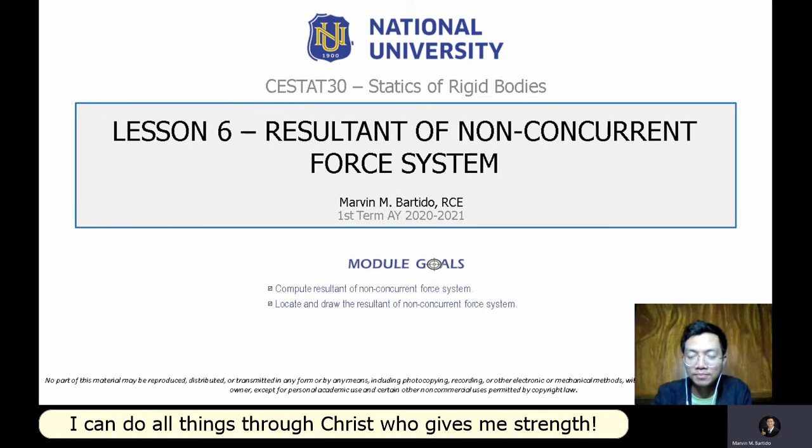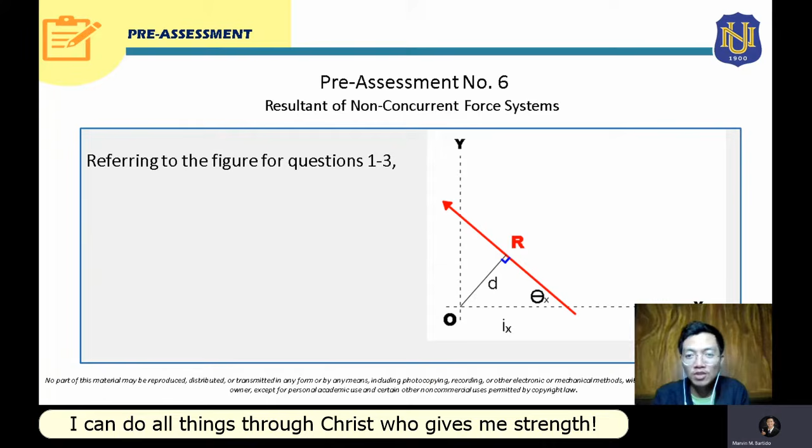So before we proceed to our discussion, you will answer first these problems for bonus points. Okay, so referring to the figure for questions 1 to 3, here's the problem. If Ry is equal to 250 Newton, Rx equal to negative 190 Newton, and Ix equal to 5 meters, determine the moment about point O.

The second question is, if the moment at point O is negative 200 pound-inch and distance d is 3 feet, determine the resultant R. And for the last question, number 3, if Ry is equal to 10 kips, Rx equal to negative 7 kips, and Ix is equal to 7 feet, determine the distance d.

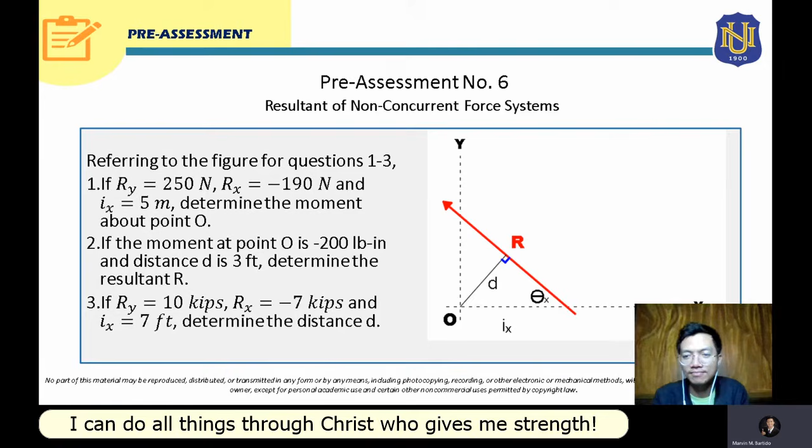Recalling non-concurrent force systems, these are force systems wherein the forces don't meet at one point. So these are force systems that are neither concurrent nor parallel. So for resultant of non-concurrent force systems, to solve for the magnitude of the resultant, that will just be R is equal to square root of Rx squared plus Ry squared, wherein Rx, that will be the horizontal component of the resultant, and it can be solved by the summation of all the horizontal components of the forces in the system.

Okay, and Ry, that will be the vertical component of the resultant, and it can be solved by the summation of all the vertical components of the forces in the system. Now, for the inclination of the resultant with respect to x-axis, we can use tangent of theta x equals to Ry over Rx, wherein Ry is the vertical component of the resultant, and Rx is the horizontal component of the resultant. So to solve for theta x, that will just be arctangent of Ry over Rx.

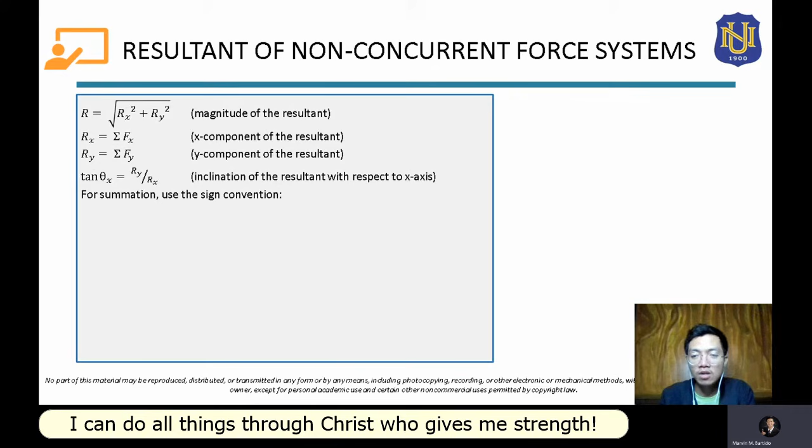Now, for the summation of vertical and horizontal components of forces, we can use the sign convention that if the force is directed to the right, in the summation, that will be positive for horizontal component. But if it's directed to the left, that will be negative in our summation. Now, if the force is directed upward, that will be positive in the summation for vertical components, and if it's directed downward, that will be negative.

So let's say we have here this non-concurrent force system. This is non-concurrent since all the forces here don't meet at one point. This force system is neither concurrent nor parallel. So for this non-concurrent force system, if we solve for its resultant, let's say the resultant will be located somewhere here. So this will be the resultant R, and its direction will depend on your Rx, the horizontal component of your resultant, and Ry, the vertical component of your resultant.

So in this case, if your horizontal component of the resultant is negative in your summation, its direction will be to the left, okay? And if your summation for Ry is positive, meaning to say your Ry is directed upward. So the resultant is upward and to the left. Let's say this is the direction of your resultant R. So your theta x will be located here. This will be the inclination of this resultant from the horizontal, and we solve it using tangent theta x equal to Ry over Rx.

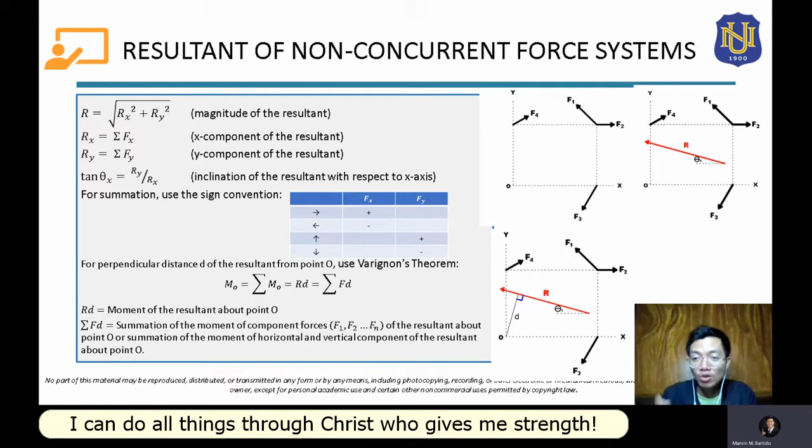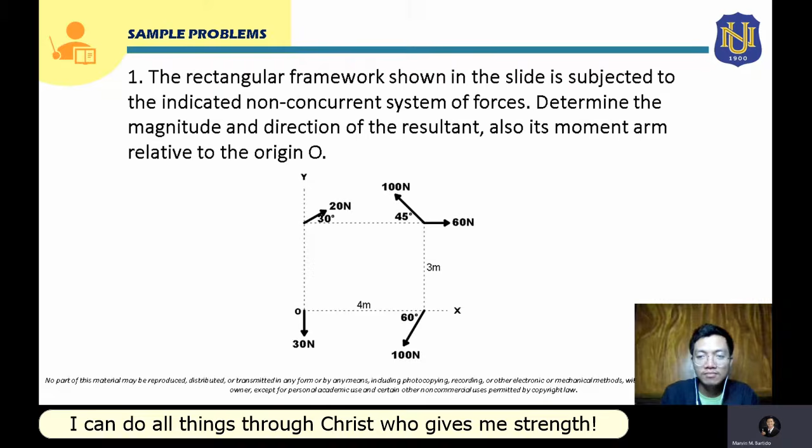So this force system is non-concurrent because the forces here don't meet at a common point. And this force system is also not a parallel force system. So meaning to say this is a non-concurrent force system. So let's start solving this. For this problem, we are asked to solve for the resultant. So your resultant must include the magnitude, the direction, and inclination or theta x. We are also asked to solve for the moment arm of the resultant from point O. So the moment arm here is the perpendicular distance d of the resultant from the specified point, which is point O.

So to solve for the resultant, we must first solve for Rx and Ry. So Rx will just be equal to the summation of all the horizontal components of the forces in the system. We have here this assumption that forces directed to the right will be positive. So let's start with this 20 Newton force. This is 30 degrees from the horizontal, so its horizontal component will be 20 cosine 30 degrees. Since it is directed to the right, it will be positive in our summation.

Now, this 100 Newton force is inclined 45 degrees from the horizontal, and its horizontal component will be 100 cosine 45 degrees. Since it is directed to the left, it will be negative. Now, our 60 Newton force is already a horizontal force, so this will be directly included in our summation. Since it is directed to the right, it will be positive. Now this 100 Newton force is 60 degrees from the horizontal, so its horizontal component will be 100 cosine 60 degrees, and since it is directed to the left, it will be negative.

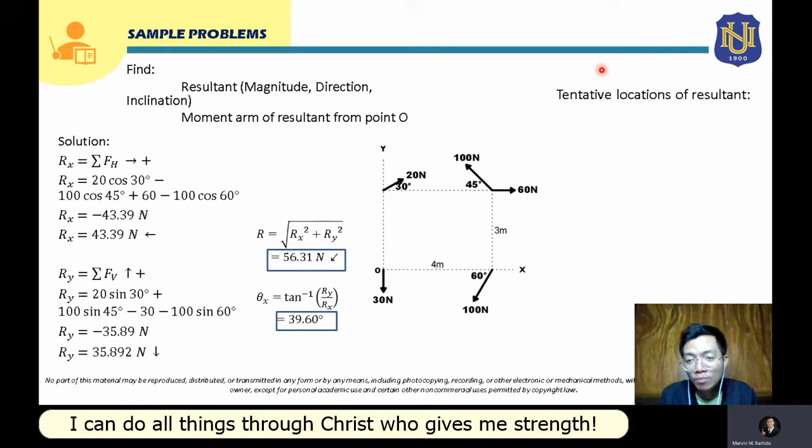Now, we are also asked here to solve for the moment arm of the resultant from point O. So we can have here tentative locations of the resultant. We can assume where we can find our resultant, but this will just be tentative since we are not yet sure of the location of the resultant. So this will be the tentative location.

So our resultant R will be theta x from the horizontal. Since it is downward to the left, it can either be located somewhere here or somewhere here. This location can be checked or proved, where the correct location will be, by solving for the moment of this system.

So if the moment of all these forces about point O, let's say, is clockwise, your resultant must be located here to produce a clockwise moment about point O. But if the moment of these forces about point O is counterclockwise, your resultant R should be located somewhere here so that it can produce a counterclockwise moment. So the location of your resultant will depend on that. We will check that on our succeeding slide.

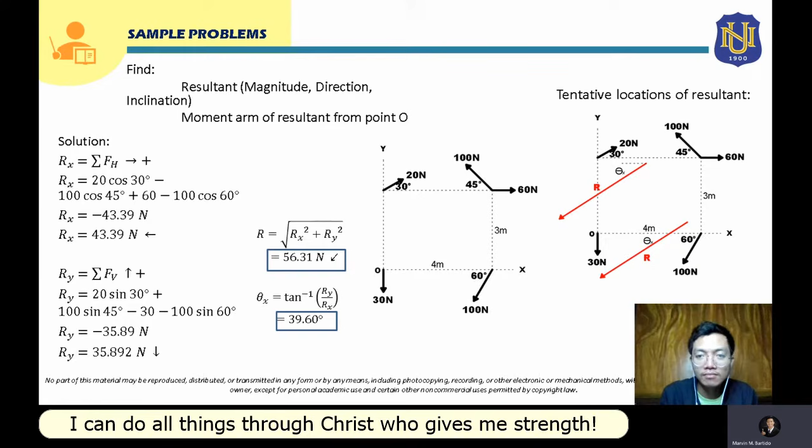So again, these are the tentative locations of our resultant. It can either be located somewhere here, at theta x from the horizontal, or somewhere here, also theta x from the horizontal. To confirm the location of our resultant R, we can take a moment about point O. So we can solve for the moment of the component forces of our resultant R. These are 20 Newton, 100 Newton, 60 Newton, 100 Newton, and this 30 Newton force.

So if we take their moment about point O, and their moment about point O is positive, meaning your moment is clockwise, then your resultant R's moment should be clockwise also. So it should be located somewhere here so that it can produce clockwise rotation about point O. But if the resulting moment of these component forces about point O is negative, meaning that moment is counterclockwise, your resultant should be placed somewhere here so that it can produce a counterclockwise moment about point O.

So let's start solving for the moment of the component forces about point O. The moment at O is equal to the summation of all the forces that have moment at O, and that will also be equal to the moment of the resultant about point O, so that will be Rd. Our assumption here is that clockwise moments or rotations will be positive.

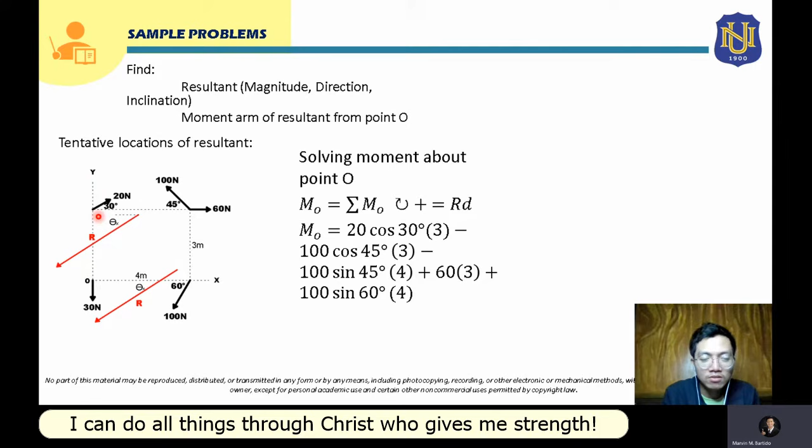Let's start solving the moment of this 20 Newton force about point O. If we put our component forces here, the vertical force will pass through point O, meaning it will have no moment about point O. So only the horizontal component of the 20 Newton force, which is 20 cosine 30 degrees, will have a moment about point O. Its moment arm about point O will be this perpendicular distance, 3 meters. It will rotate this way, clockwise, so it will be positive in our summation.

Now, for our 100 Newton force here, if we put our components here, both component forces will have a moment about point O. Let's start with the horizontal component, which will be 100 cosine 45 degrees. Its moment arm about point O will be 3 meters also. Its rotation about point O will be this way, counterclockwise. That's why it will be negative here.

Now, its vertical component will be 100 sine 45 degrees, and its moment arm will be this perpendicular distance about point O, which is 4 meters. So that will be 4 here. Its rotation about point O will be counterclockwise; it will rotate this way. That's why it's negative here.

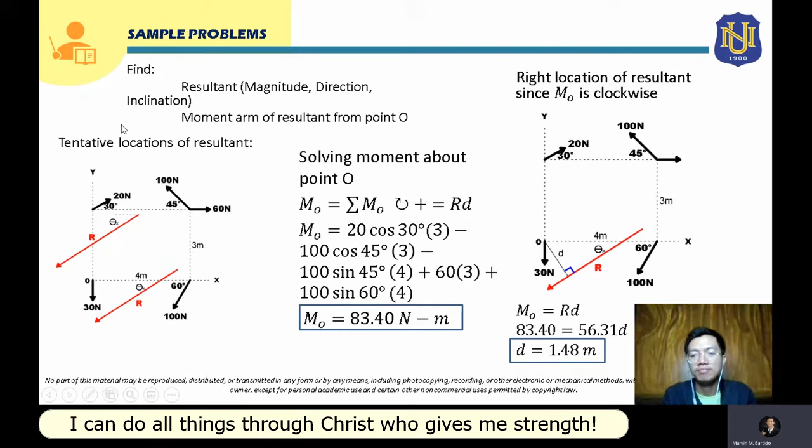Now, for sample problem number 2: in a certain non-concurrent force system, it is found that the summation of Fx is equal to negative 80 Newton, the summation of Fy is equal to 160 Newton, and the summation of M sub O is equal to 480 Newton meter in a counterclockwise sense. Determine the point at which the resultant intersects the x-axis.

For this problem, the summation of Fx is actually the horizontal component of our resultant, negative 80 Newton, meaning this horizontal component is directed to the left. The summation Fy is the vertical component of the resultant, and since it is positive, it is directed upward.

We also have a moment at O equal to 480 Newton meter, and this is counterclockwise, so that will be negative. We are asked to determine the point at which the resultant intersects the x-axis. So let's start solving this.

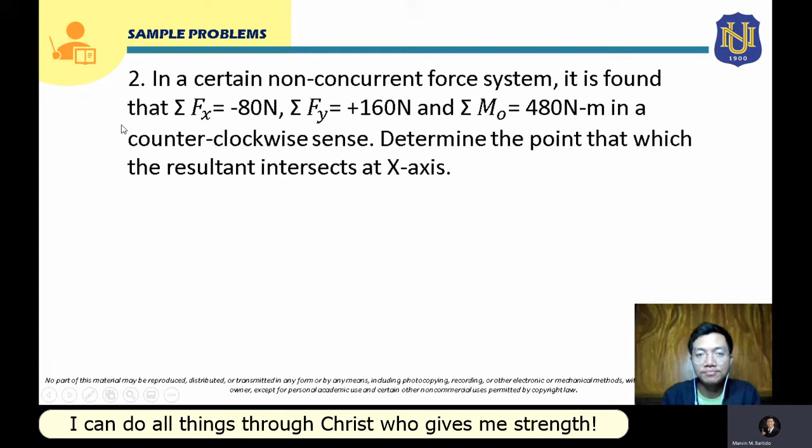Again, these are the given for this problem. So we have here Rx, or the horizontal component of the resultant. We have here the Ry, or the vertical component of the resultant. And we have here moment about point O. So this will be the illustration of this problem.

So our resultant will be directed this way because our Ry is upward, right? And from our Rx, that will be directed to the left. So meaning to say your resultant should be directed upward to the left. So also there's a given moment here at point O. So the given moment at point O is counterclockwise.

So it will also satisfy that, because this resultant R, if it is directed this way, and if it will be rotated at point O, it will really produce a counterclockwise rotation. So it will produce this given. So from here, we are asked to solve for the distance, or the point wherein this resultant will pass through the x-axis. So this is the x-axis, and the point where it will pass through is at this point.

So we will solve for this distance ix. So this will be the item that we are going to solve for this problem. We are going to solve for ix. Now, to solve for ix, we can actually have two solutions here. So we are going to solve first using our solution 1. So for solution 1, we are going to use the given moment here. So the given moment here is negative 480 Newton meter, or 480 Newton meter counterclockwise.

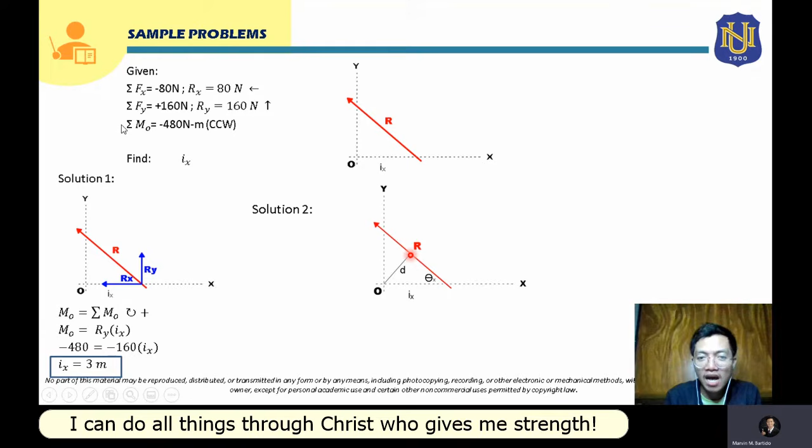So from here, we know that the perpendicular distance of R from point O will be this distance d. And there will be a formed triangle here actually, right? So from that formed triangle, we are going to solve for the value of ix. So in this triangle, the side that we need here to solve is this distance d. So to solve for this distance d, we just have to also use this moment at O, and we also have to solve for the resultant R.

So to solve for the resultant R, it will just be square root of Rx squared plus Ry squared, wherein your Rx is 80 newton and your Ry is 160 newton upward.

Now, solving for your R, it will just be 178.89 newton, and its direction is upward to the left. So again, let's input that in our calculator. That will be the square root of negative 80 for our Rx, so negative 80 squared plus 160 squared. So that will be 80 times square root of 5, or 178.89 newton. So that will be the magnitude of our resultant.

Now, to solve for this distance d, again, we will use this moment at O. Your moment at O will just be equal to the moment of this resultant R. The moment at point O is negative 480 since that is counterclockwise, and that is also equivalent to Rd, wherein your R is 178.89, and your moment arm here will be this distance d, and since the rotation of your resultant R about point O will be counterclockwise, it will also be negative here.

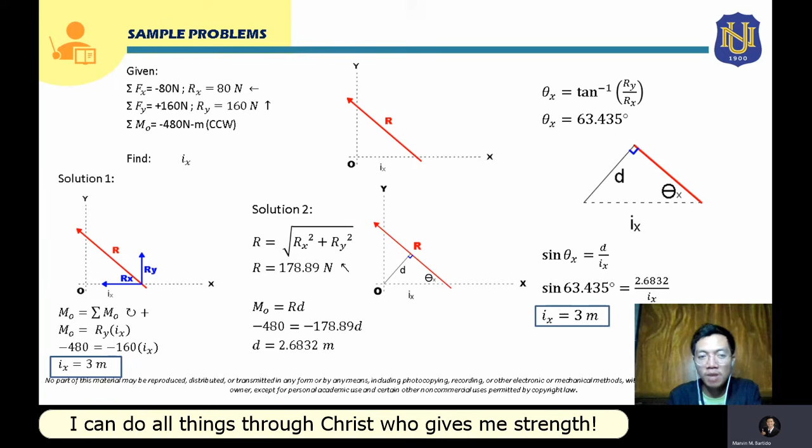So that will just be 2.6832 over sine of 63.435 degrees. Let's input in our calculator. So that will be 3 meters as well. Of course, your solution 1 and solution 2 should give you the same answer, so either of these two solutions you can apply. So this will now be the answer for this problem, 3 meters.

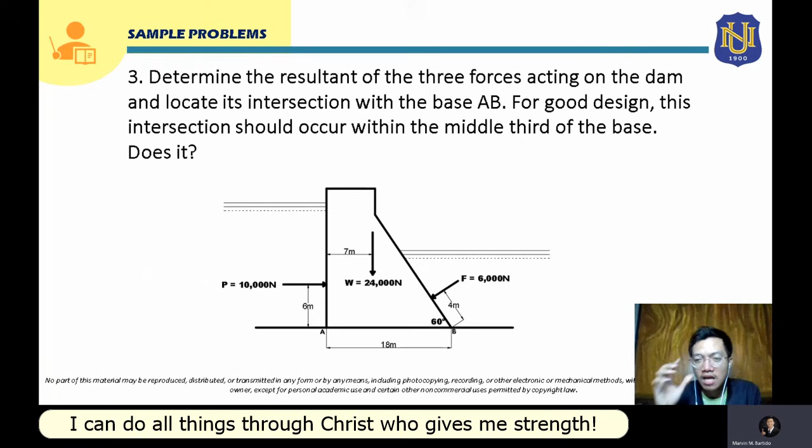So if our resultant passes through that interval, from 6 meters to 12 meters, meaning to say this dam is good design. So we will start solving this problem. Again, for this problem, we are asked to solve for the resultant. That should include the magnitude of the resultant, the direction, and the inclination. Now we are also asked to solve for the location of the intersection of the resultant with the base AB. So we will determine where our resultant R will pass through our base AB.

Also, we are asked if the resultant will intersect at the middle third of the base. Again, the middle third of the base will be from 6 meters to 12 meters. Since this is 18 meters, divided by 3 that will be 6, then plus 6 will be 12, then plus 6 will be 18. So our resultant should pass through that middle third, from 6 meters to 12 meters in our base AB, so that we can say that it is good design. We will confirm this in our computations.

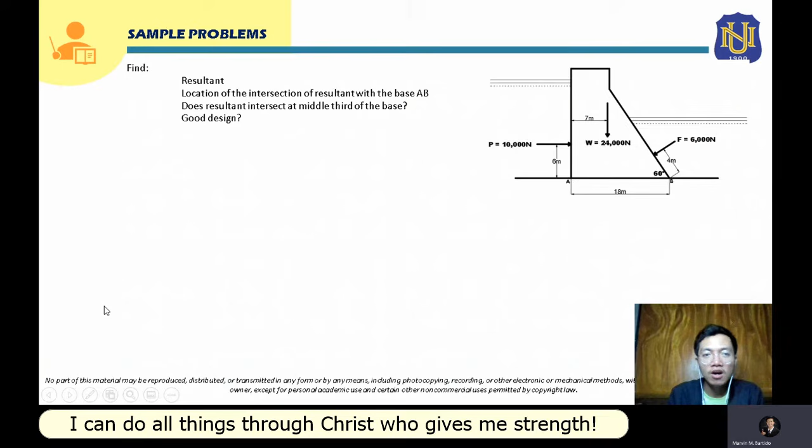So for now, we have to solve first for our resultant. So we have to solve for Rx and Ry. Again, this is our dam. For the horizontal component of the resultant, Rx, that will be equivalent to the summation of all the horizontal components of all the forces in our system. The forces that have a horizontal component are this 10,000 Newton force and this 6,000 Newton force.

This 6,000 Newton force is actually perpendicular to this incline. If the incline is 60 degrees and we put here a vertical axis, the angle from the vertical axis to this force will be equal to this inclination, 60 degrees. So this will also be 60 degrees here. So from here, we can now start solving for Rx.

So Rx will just be the summation of all the horizontal components of the forces. Let's start with the 10,000 Newton force. Since this is already horizontal, it will be directly included in our summation. Since it is directed to the right, it will be positive 10,000. Let's proceed now to this 6,000 Newton force. Since this is inclined, there will be a horizontal component.

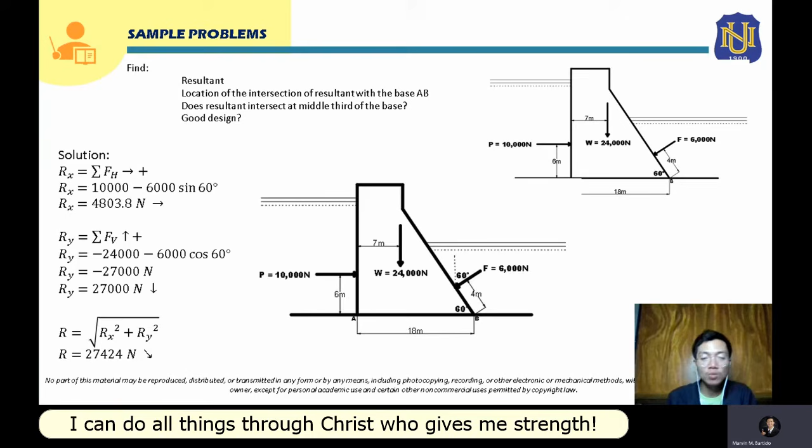So let's input the values in our calculator. That will be square root of 4,803.8 squared plus 27,000 squared. So that will be 27,424 Newton. That will be the magnitude of the resultant, and its direction again will be downward to the right. So that will be our answer for the resultant.

And also we need to solve for the inclination, or theta x. That will just be arctangent of Ry over Rx. Let's input that in our calculator. Our Ry is 27,000 and our Rx is 4,803.8. So that will give you 79.912 degrees. So that will be our theta x. It is also part of our answer for the resultant. So these will be the answers: the magnitude, the direction, and the inclination, or theta x.

So we will now proceed to the next item, which is the location of the intersection of the resultant with the base AB. So let's proceed. Again, for the second item, we have to solve for the location of the intersection of the resultant with base AB. So we are going to assume the location of our resultant R. Let's say it will pass through this base AB this way. But we are sure that the direction of our resultant R is downward to the right, since we have already solved that in our previous slide.

What we are not sure of yet is the point where it will pass through base AB. So we will assume that it will pass through this way. So let's say that for this resultant R, the point where it passes through base AB will be at this point.

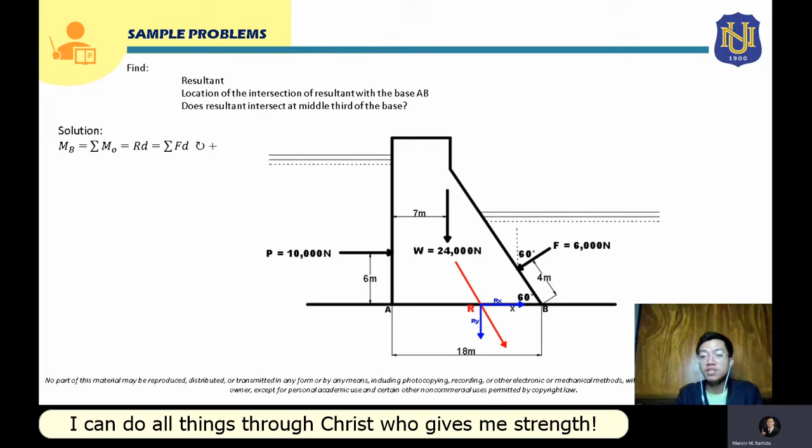So let's start solving this. We will take moment at point B, which is equal to the summation of forces that have moment at point B. That will also be equal to the moment of the resultant about point B, and equal to the summation of the moments of the horizontal and vertical components of the resultant about that same point, point B.

We will start by solving first for the moment at B using the component forces 10,000 Newton, 24,000 Newton, and 6,000 Newton. For 10,000 Newton, its moment about point B will be 10,000 times 6 meters, since the moment arm is 6 meters. It has clockwise rotation about point B, so it will be positive here.

Now for the 24,000 Newton force, its moment arm about point B will be 18 meters minus 7 meters. This distance is the moment arm, 18 meters minus 7 meters, so that will be 11. So 24,000 times 11, and its rotation about point B will be counterclockwise, so that will be negative here.

Now for the 6,000 Newton force, it has a perpendicular distance from point B, since this 6,000 Newton force is perpendicular to this incline. So this 4 meters is a perpendicular distance and will be the moment arm. That will be 6,000 times 4, and its rotation about point B is counterclockwise. That's why it will be negative in our summation.

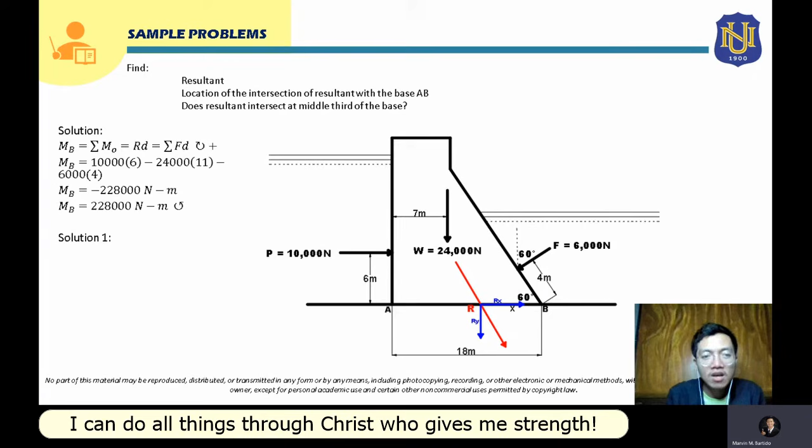Now since we already have the moment at B, we can have two solutions to solve for the distance x. For solution 1, we will take the moment of the horizontal and vertical components of our resultant R.

We will take their moment about point B, and we will equate that to the moment of these forces that we have solved here, which is 228,000 Newton meter. So again, moment at B will just be equal to the moment of the vertical and horizontal component of the resultant. Our moment is negative 228,000 at point B. That's the value that we have solved, and since it is counterclockwise, it will be negative here.

From the horizontal and vertical component of the resultant, your Rx will pass through point B, meaning it will have no moment about point B. So only Ry will have a moment about point B, and its moment arm will be x, and that is what we are solving here. We have already solved for Ry from our previous slide. The rotation of Ry about point B will be counterclockwise; it will rotate this way. That's why it is negative also here.

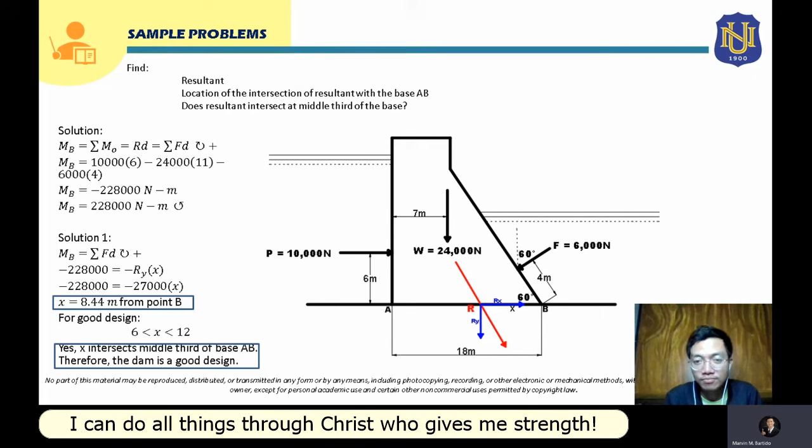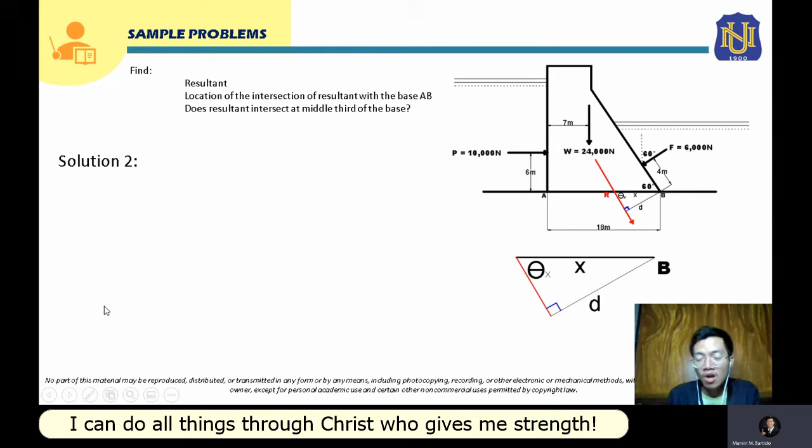We can also solve for distance D, since we already solved for our moment at B and have the magnitude of our resultant R. If we apply Varignon's theorem, the moment at point B is also equal to the moment of the resultant, which is just R times D, so we can solve for distance D. After solving for D and theta x, we can now solve for this distance x, using SOHCAHTOA from this right triangle, whatever is applicable. So we will first solve for distance D. Our theta x, we have already solved.

So for our distance D, again, the moment at B is equal to the moment of the resultant about that same point, which is point B. So that will just be RD. Our assumption here for positive is clockwise rotation. Our moment at B, we have already solved that. That is negative 228,000. And our resultant R, we have already solved that also.

That is 27,424. But since our moment at B is negative, right? That is negative since the moment is counterclockwise. And also for our resultant R, its moment about point B, if we rotate this about point B, it will be counterclockwise as well. So this will also be negative here. Our moment arm here is distance D.

So we can actually solve directly distance D from here, right? The negative sign will just be canceled. So this will be 228,000 divided by 27,424. So this will give you 8.3139 meters. So that will be the distance D.

Now again, we have already solved for theta x from our previous slide. So that will be 79.912 degrees. Since we already have theta x and distance d, we can now solve for x using SOHCAHTOA, since this is a right triangle. Our distance d here is actually the opposite side of the triangle, since this is the side opposite to theta x. And this x, since this is the longest side of this triangle, is the hypotenuse.

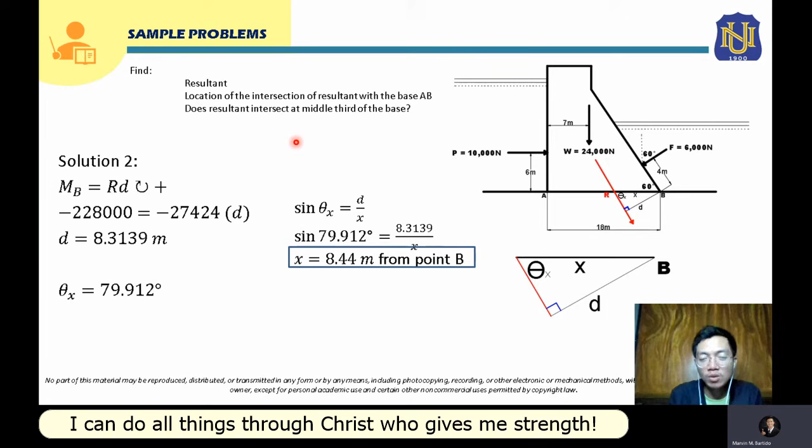Again, there is a follow-up question here: does our resultant intersect the middle third of the base? The resultant should pass through within 6 meters to 12 meters. Since our x here is 8.44 meters, it satisfies that interval. So therefore, the intersection of the resultant with the base AB is within the middle third of that base, so the dam is a good design. That is also the follow-up question, if the design is good. So therefore, the design of the dam is good.

So these will now be the answers for this problem using solution 2. And these are also the same answers that we had in solution 1. So these will be the answers now for this problem.

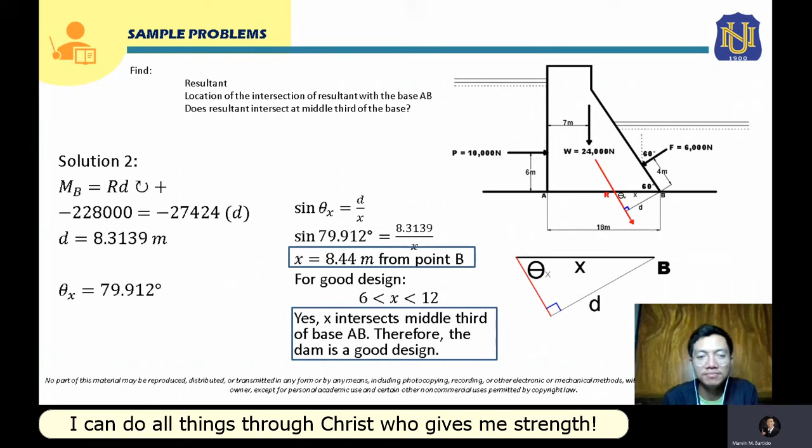Now, let's proceed to sample problem number 4. The force system shown consists of the couple C and 4 forces. If the resultant of this system is a 500-pound-inch counterclockwise couple, determine P, Q, and C. So our situation here is that this force system has 4 forces, the ones mentioned here, and also there is a couple C. This couple C is actually a component couple, part of this force system.

There's also a given here, that the resultant of this system is a couple. We have already discussed in our topic about couples that if the resultant of the system is a couple, meaning to say the resultant force is zero, right? So that's the concept. If the resultant of the system is a couple, again the resultant force is zero. So we are asked here to determine P, Q, and C. From that given, we can now start solving.

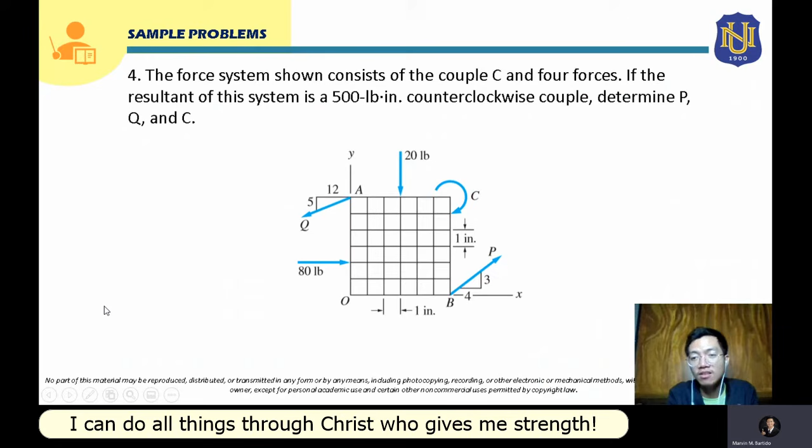So again, our given here is that the resultant of this force system is a couple. Therefore, the resultant force of this system is zero. And if the resultant of this system is zero, meaning to say its Rx and Ry are also both equal to zero. So we can use this data that Rx is equal to 0 and Ry is equal to 0.

And also, our couple here, or the resultant here, is a couple, which is negative 500 pound-inch, since it is counterclockwise. So we can use this when we take moment at any point in this system, because, as we have already discussed in our discussion about couples, a couple is independent of the center of moment, independent and constant at the same time. So even if we take moment at any point in this system, that couple will be the same magnitude and direction. So we can use that given later on.

So again, we are asked here to solve for the unknown force P, unknown force Q, and the unknown couple C. This couple is different from this couple here. This couple is a component couple, part of the system. So we will start solving now. For our solution, we are going to use the data that we have established here, that Rx is equal to 0. So we will use that here.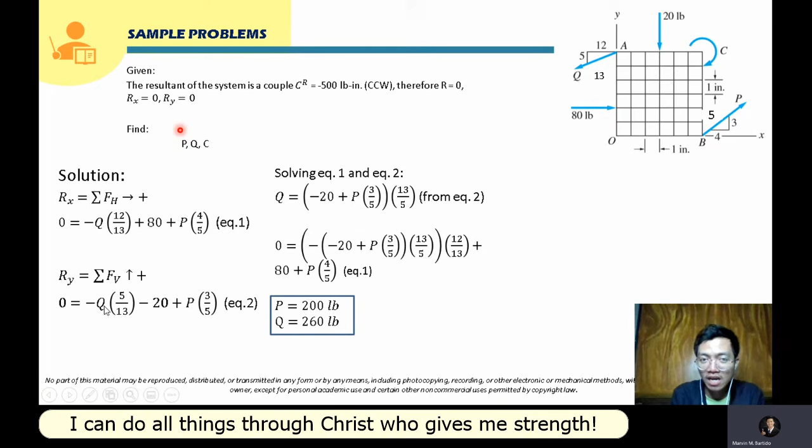Now, if you have already solved for the value of P, we can substitute that value to either equation 1 or equation 2, and you can now solve for the value of Q. So our Q here is 260 pounds. So these will be the answers for P and Q. We have already answered two of the items that we are asked to solve. The remaining item is the couple C. So to solve for this couple C, this is a component couple, part of the system. So we can also use the resultant couple that is given here, which is 500 pound-inch.

Again, our concept for a couple is when you take moment at any point in this system, it will be the same moment effect. So we can use our given resultant couple here. We will take moment at point O. The moment at point O will be equal to this resultant couple. This is 500 pound-inch and this is counterclockwise, so this will be negative, and that will also be equivalent to the moment of all these component forces that make up the resultant.

So we will take their moment about point O as well. For moment at O, that will be the resultant moment or the resultant couple, which is 500. Since it is counterclockwise, it will be negative here. So we will take the moment of all the forces here about point O.

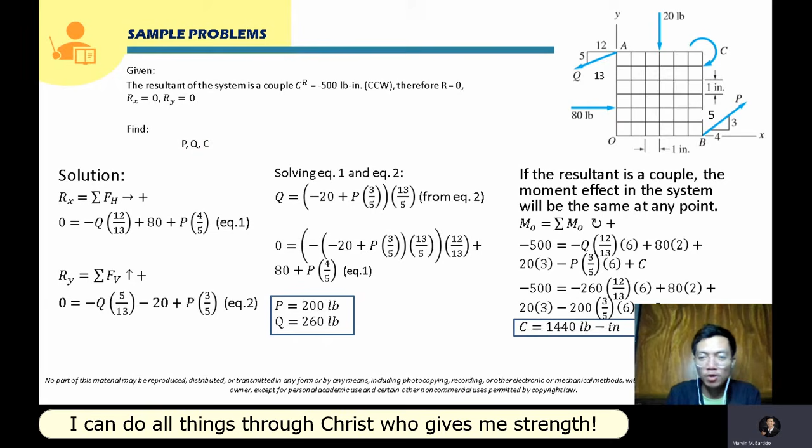So don't forget to include the right unit. You really have to always check the given in the problem. This is pound inch, because if the unit that you give to your answer is wrong, your answer will be wrong. So this will now be the value of your couple C. And since the answer here is positive, it satisfies that our couple C is clockwise. So these are now the answers for this problem for P, Q, and C.

So that concludes our discussion. I hope you learn, and I hope that you attain the learning outcomes for this topic.

And also, class, I just want to remind you that you will reap a harvest at the end of this if you don't give up. So let us persevere and let us diligently study this. Because you know what, class? Your efforts are not in vain.